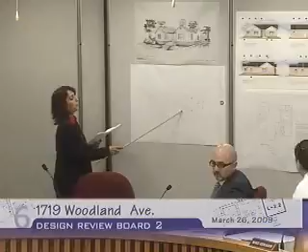Currently, the site includes the existing house and a detached garage at the back. The existing 25-foot setback remains untouched and unchanged since the proposed addition will be set back in relation to the existing house. The location of the proposed addition is on the existing driveway pavement, which will minimize the amount of landscaping that needs to be replaced.

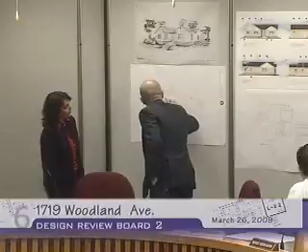The changes to the landscape include a new 10-foot wide driveway and a walkway. The majority of homes in this neighborhood are located on the front of the lot with a detached garage at the rear. The subject house will have a wider facade as a result of the addition because the addition is proposed to the side of the house, but will remain appropriate to the neighborhood.

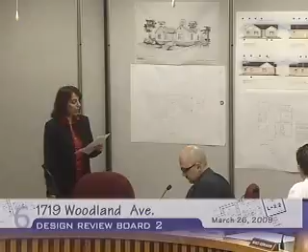The new entrance door and the proposed addition being on a different plane than the existing house create modulation on the street front facade. The project relates well to the context of the neighborhood where the majority of homes are one-story and occupy a large portion of the lot width. There will be no increase to the 16.5-foot height of the house, and the street front setback remains unchanged.

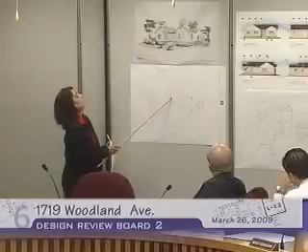The interior setback will be reduced to the east of the site, and that means the detached garage on the adjoining lot will be impacted. But the detached garage and the setback separate the neighbor house and the proposed addition, which minimizes the impact of the addition.

On the west and the north, there will be no reduction in the setbacks, and that together with the fact that the height of the house will not be increased will minimize any impact from the proposal.

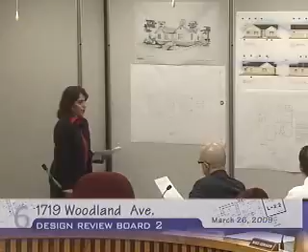The front facade of the building will be maintained, and the entrance door will be relocated from the side to the front. Tan vinyl windows are proposed for the entire house, as well as new shingle roofing for the whole house. Windows will be recessed with surrounds similar to the existing.

The most noticeable new element of design is the stone base which wraps around the building. Since the house is very simple in design, minimal traditional, the vinyl window is appropriate and not out of character in this case.

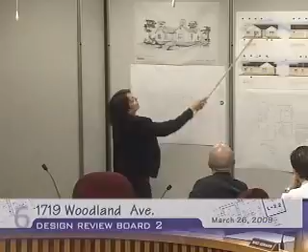There is a discrepancy between the elevation proposed and the rendering, and it should be corrected to clarify that the rendering is the correct finished elevation. Also, the elevation shows changes to the existing facade, while there is no change except for the new entrance and the addition. The front facade will remain unchanged.

Staff recommend approval of the project with the following conditions: the proposed front elevation to be shown on the perspective drawing, and the elevation drawing shall be modified to match this. Also, the lawn shown in the center of the driveway should continue to the end of the building as shown on the perspective drawing.

The next condition is the elevation drawing shall be amended to show the true scope of the work. There will be no changes to the front elevation of the existing house, with the exception of the new entrance door and the addition. The existing window surrounds shall remain. The proposed windows should be recessed, and if muntins are used, they should be placed on the face of the windows.

Should the board approve the project, language used as a draft record of decision is attached that I can go over later if you'd like. This concludes my presentation. If there are any questions, I'm here to answer.

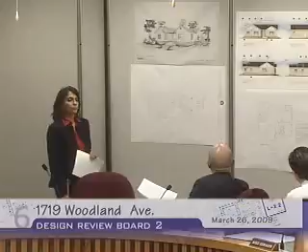Okay. All right, any other question? Anything? Okay, I have a few questions.

Coming back to the windows, if those are the types of windows on the perspective we're looking at, the design—if you look at the north elevation, you have a thin line. The south elevation window design and the north elevation window design look a little bit different. There's no frame, or there's a thin line. We don't know if that's a casement window or what type of window we're looking at.

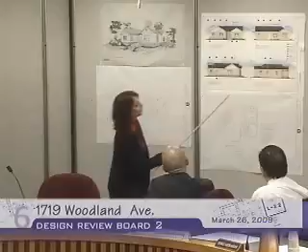Well, it's shown as casement on this elevation. On this elevation, it's shown as casement, or it could be sliding. But they need to be corrected and clarified. I'm sure the architect can further explain this.

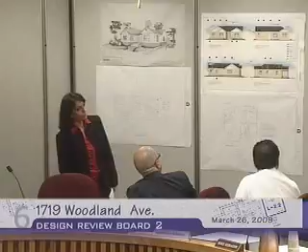I have one more question for the architect. We haven't opened yet, so once we open it, they'll present, and then we can ask our questions. If there are any zoning questions, we can go ahead and ask the planner. We're okay with the zoning questions?

I'm presenting the project, as the case planner said, a 796 square foot addition to the 1,044 square foot existing house. In answer to your question regarding the windows, we had a few times back and forth regarding this design. The owner is here, and I've been told previously that I could come with two designs. I presented two designs to the case planner, but I see there is just one presentation.

The original design, which the owner would like, is something like this—instead of a flat roof on top of the entrance, it's a gable roof.

With respect to the city planners - can I see that? Yeah, with respect to the city planners. Well, you need to speak in the mic so they can hear you.

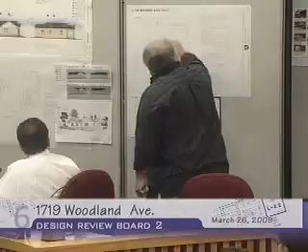This whole section, this gable, could have come off of here. Exactly, and there could be a cricket right here that goes to the side. So then you'd be showing this one big gable, which is the paired gable. Then you'd have this plane coming across that, and you could extend out for the porch if you wanted to. I think it would make a stronger facade, much cleaner. But I don't necessarily have a problem with what's there, I just think it depends on how far you want to go in.

Okay, a couple of things. My first question, what's the minimum width of the driveway? 10 foot, is it 10 or 10-9? If it doesn't include... actually in this case it can be 9, because the walkway is separate from the driveway.

First, on the site plan, I think one of the biggest emphasis in the existing house is this large buffer between the two homes that they have. What they've done, and actually one of the photos they've submitted, has the identical result of what they're going to end up having. We don't have a clear direction on how they're going to address the fencing of this. So I don't know if there's going to be a fence put up here, or is it going to be a wood fence, masonry, or whatever it is.

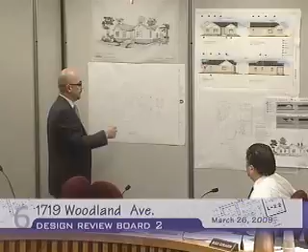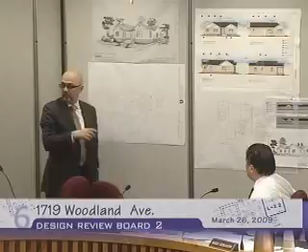But whatever the case may be, I think we definitely want to reduce the width of this. It's not existing, it says 10-foot existing, but it's not an existing driveway. So I think we want to go as minimal as possible to provide some sort of landscape buffer there, maybe some growing vines or something to cover that fence. I don't have a problem with the addition, but I think the driveway is a really good point to carry along. I would support that.

Second thing is the windows. Based on the architect, they're already going to be replacing their windows. So if they're going to replace it, I would rather go with a higher quality than vinyl windows—prefer to go one notch higher to fiberglass, to have the option not only of painting but also the depth and the entire structure, how it's put together. I think you get much better depth and quality that way. I would want to see the same details that are there now, the wooden sill extended out with the lighter frame around it, rather than putting this Mediterranean style all around. I think that sill detail that's there now should be carried over.

There's a couple other things, like for example, someone brought up the bay window. I think it's not just simply showing a bay window—the bay window itself, if it's drawn the way they're going to build it, is going to need a roof on that. So I think the drawings need to be drawn accurately to show us the proper detail.

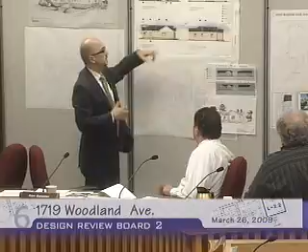But overall, I don't have a problem with the project. I think regarding the double hung versus the slides, if the windows are going to get replaced, might as well keep them all consistent—have one type of window. So that's what I would recommend. As far as the elevations, I don't have a problem with either suggestion.

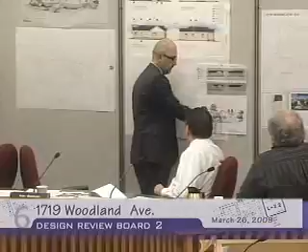I think this is fine, but this section or sketch that's drawn is almost impossible to build. You cannot have a cantilever out about 4 feet without any support. You're going to need a beam coming out of there, probably ending up with a post or column to carry this cantilever, which will add more detail and character to this.

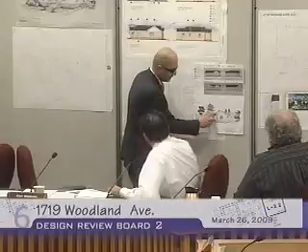I don't think you can put two roofs next to each other without having either a ridge beam or ridge board, so you'll end up needing some sort of support in the middle to carry the centerpiece out. By the time you truly build and draw this correctly, you'll end up with a much more substantial, better detailed front elevation. But you're still going to have that flat plane similar to what you have here, even carrying this through, since the two roofs come to one point and still need some flat roof to split and carry the water down.

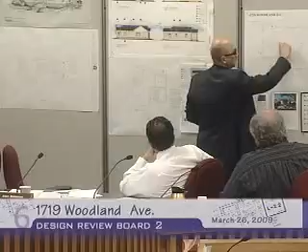You cannot have that. My colleague's suggestion was to put this flat area in the middle instead, that's another option. But I prefer this better because truly this is not drawn properly, and if it's drawn properly, you're going to have almost a foot and a half of flat area.

Being at a 1-in-12 pitch, you're going to have a torch-down roof rather than whatever else, so you'll see blotches of asphalt that won't look right. You want to hide this front as much as possible, or extend the parapet or fascia board as high as you can to cover that roof beyond. But the way it's drawn, it's not going to look like that.

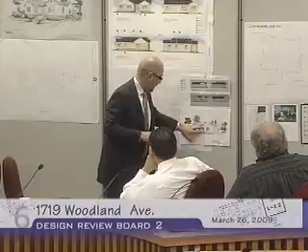It's drawn very nicely, but in actuality, when it gets built, it's not going to do that. So I think either this solution or the solution that you guys came up with would definitely give a little bit more character on that.

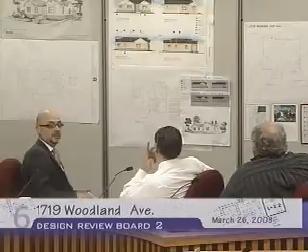As far as the stone on the bottom, I think it's fine. But I'd highly recommend going with fiberglass and a higher quality window sill and window detailing that would work with this. If they said they weren't going to change it, I'd say just keep the whole thing and match it, and go with fiberglass in the front so we can paint it, keeping the rest the same.

But they said they are going to be replacing all the muntins, and you can't remove existing muntins without removing the entire window. So if you remove it, I'd suggest replacing it with a better quality window.

Do you have no preferences as to double hung, single hung, or sliding, or placement? I don't have a preference, but I would like to have the dividers the way they are now. I think it goes with the character of the house, maintaining the nice woodland feel of the neighborhood, rather than a single pane without breakups, which is more of a modern look and goes outside the traditional look that the existing house and adjacent homes have. But I would want the whole thing to be consistent, that's what I'd suggest.

So either slider or double hung? I think what's nice about the double hung is it adds a little more interest than the slider. I think it would look too modern if it were sliders, especially on the front.

It could be that they do just the dividers in the front, which happens a lot on older homes, and toward the back, if they didn't want dividers, not do them there. I'd be open to that. It's unfortunate that something done so nicely now, with all those dividers, would change to something less.

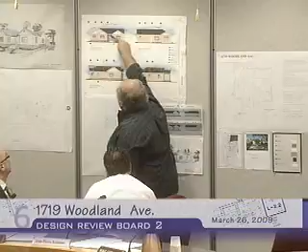I would be completely in support of and would make a motion for this. I don't know if it's too much, but it's practically the same amount of work, same amount of framing, if you took this gable element and rotated it here, did the cricket going this way, you would have that exact elevation. That would be a true elevation because this element would then come down to the front. I'd even like it to extend out a little more so it had a bit of covering for the door and the column and the whole thing. It just pulls right out with that.

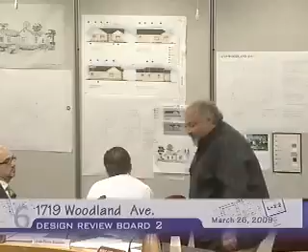I think if from the front it has a massing, he could still do this California gable on it, the roof that comes across. It's practically the same amount of work, and I think it pulls the design together for me. And he can still do the front gable.

I agree with both Alan and Giragos. If we decide to approve this design with the second option, we could work it out, and as Alan said, it needs additional detailing to show the perspective, we'll go for it. If we're going to go with option one, the flat roof, I think it's not complete. That flat roof, I have problems with it.

Waterproofing, the looks, the entrance is going to look flat. I don't think it's the best solution, in my opinion. If you really want to do it the proper way, I think you should go with what Mr. Giragos is saying: flip it, have a clean elevation, and the entrance will have a more dominant elevation, and leave it in the back, hidden from the street view. I think that's the proper way.

Are we clear how this thing is going to look? I don't think the staff is. Can I draw on the plan? I can sketch it out. If we flip the gable so that it's perpendicular to the street, then we would.

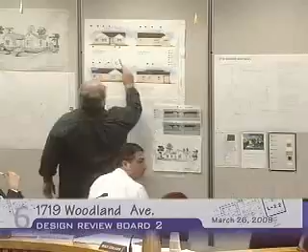You'll still have that elevation on the side, because this is the cross gable right here. You'll still have it on the front, but you wouldn't have the front-facing gable at the street. Imagine that front facing is California'd over.

So the gable would be added onto it, and then the side elevation would essentially be two gables next to each other without a flat piece in the center. And it's hidden there, so the cricket is hidden because the gable is now there.

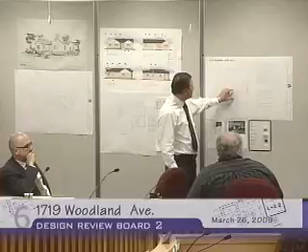That's the gable going sideways, and the cricket is hidden now behind this. I'd rather have this - if you're going to go with the flat roof, I'd rather have that flat roof in the center, which is not visible from the street, and you have a much cleaner roofing system. You have that elevation, and by doing that, you'll also give a higher ceiling at the entrance, so you'll have a better design interior-wise.

So then, this gable is just this dimension? It's like this, that's a California gable. Make a marker just to here, and it goes to the ridge. Wait, what you're saying - this is just a California. There you go, here we go.

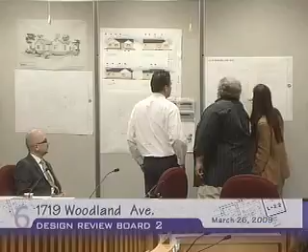This is sloping down. This is sloping down. That's sloping down. And then the cricket is back in here, flowing that way.

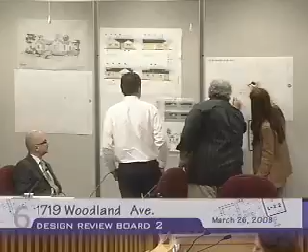I think it will look much cleaner. And then you can even extend the rafters out a little bit here, put a column. Nice porch, very nice porch.

So then this, and this one - this is the ridge, here this is the ridge. You'd have essentially two gables next to each other, like this.

Also, I mean, the living room window could be larger too. I think it'll make a difference to symbolize that.

Okay, so it looks like we have two options for the roof. Do you want to have the two options for the roof, and then we can work with the applicant and the owner, and they can decide, because I think now we have a clear understanding of what those two options are. Now, if you want to say one over the other, we can. I'm fine with either. It's up to them, I'm not making the motion.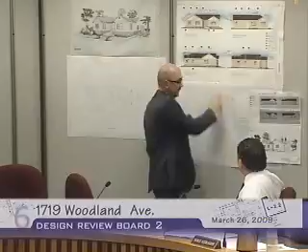Two other items, just to say this thing - they set the window off in the bedroom, so that means they really don't care about where the window sits in the bedroom. So if that's the case, if they're okay with it, this is a suggestion, I would move this over so that it's centered - this window centered with the ridge. Also the front entry door, rather than being just off the shelf, just spend the time and look for a quality door that looks and works with the architecture.

Okay, so a quality door in this case would be a solid wood door or fiberglass door. Obviously it's up to them what type of door they want, the material, the make, whatever they want to buy, I'm okay with. There are some aluminum ones out there that look just as fine, but pick a door that works with the architecture, not just off the shelf from Home Depot.

Okay, so with this style we would assume that means a very simple door, maybe a couple of panels if they want some lights in it, but it has to work with the architecture, and it could be aluminum, fiberglass, or wood - up to them, but we would have to review the design of the door. I'm sure they'll bring it in when they're bringing it out.

That would have to be a condition, so that we would make sure to track that. If it's a condition, or if you wanted it to be a consideration, then we would probably track it less closely. And the windows, I guess, need to be addressed.

I'm in support of Chairman Malikian's upgraded fiberglass with dividers, at least. And then you say, well, where should they be? They should certainly be on the front, and then the east and west. I mean, the only place it wouldn't be is the back - I guess that's the north - where I wouldn't care about dividers.